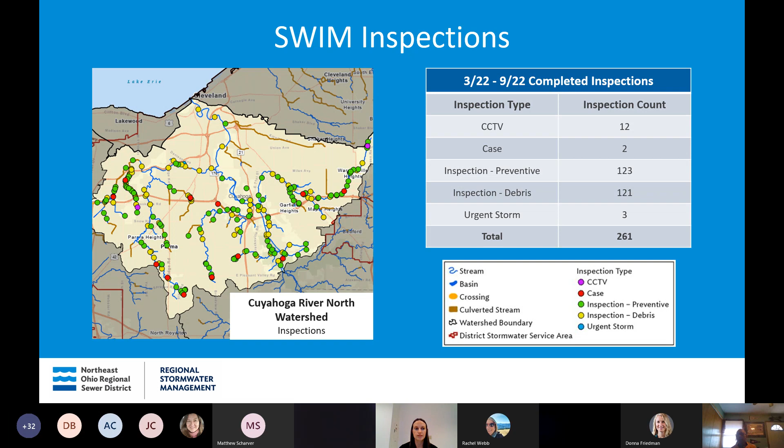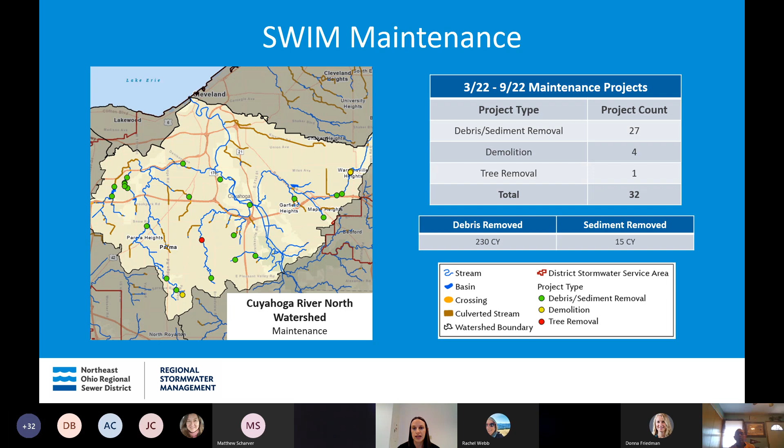And on to maintenance. So we have removed 230 cubic yards of debris and 15 cubic yards of sediment in the north, with 27 of those being debris and sediment removal projects. We've also performed 4 demolition projects and 1 tree removal.

Some of the larger scale projects we performed recently, one of these is a large scale sediment removal project that we did at Riverview Road in Brecksville. Riverview Road frequently floods, flow regularly overtops the roadway during wet weather, causing road closures. This crossing is immediately downstream of sediment vaults, and there was minimal freeboard, about 3 inches at the crossing under Riverview Road. So this project that we performed created over a foot of freeboard by dredging 500 feet downstream of Riverview Road.

We also jetted sediment from underneath the crossing, performed mechanical and hydrovac removal of the sediment from the vaults, and we also hydrovaced sediment 150 feet upstream of the vaults within the culverted streams. That totaled 472 cubic yards of sediment that we removed.

The two culverts that are upstream that discharge to the sediment vaults were also inspected. One of those carries the primary stream flow to the vaults, and the other is activated during wet weather and acts as an overflow channel. We found that there was some woody debris accumulation in the culverts, which was removed to improve conveyance, but we did leave some bedload material within those culverts.

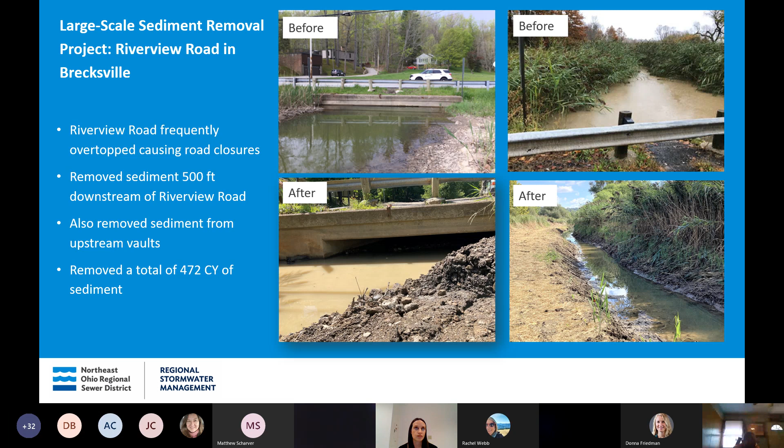We also completed a project upstream of Riverview Road crossing. This is Picha Lake in Brecksville. This basin was filled with sediment and overgrown vegetation. It was designed to be a 1.25 acre wet basin.

But this dredging project is nearing completion to restore the storage capacity to Picha Lake. We removed roughly 8,000 cubic yards of sediment from the basin, which will allow sediment to be captured within the basin, reducing what's transported downstream to the vaults and the Riverview Road crossing. The combination of both projects will allow water to flow more freely and reduce flooding at Riverview Road.

These are both part of an interim project to raise Riverview Road and will provide immediate relief to the nearby residents until that's completed.

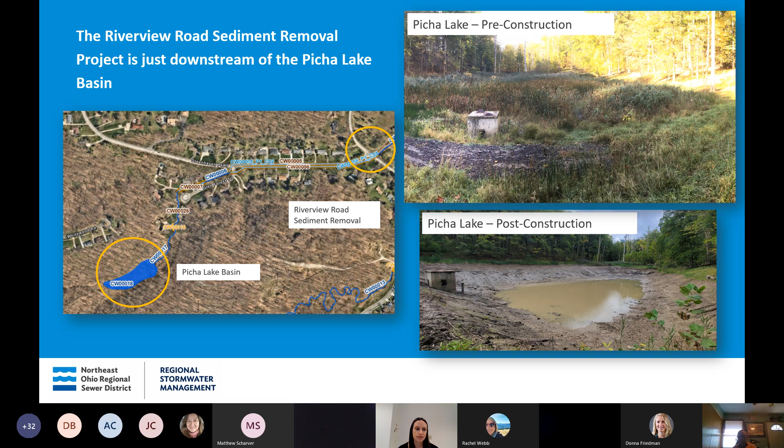The next project I'm going to talk about is our Echo Lake Basin Drawdown in Strongsville. The goal for this project is to restore the wet pond to a natural stream channel. The stormwater master planners found there was no flood reduction benefit in having the pond in place, and the homeowners association and surrounding residents are on board with this project.

This project involved the gradual notching of the concrete impounding structure. The first notching was performed in February 2022, which allowed a stream channel to form, and bare areas were then planted with native seed mix.

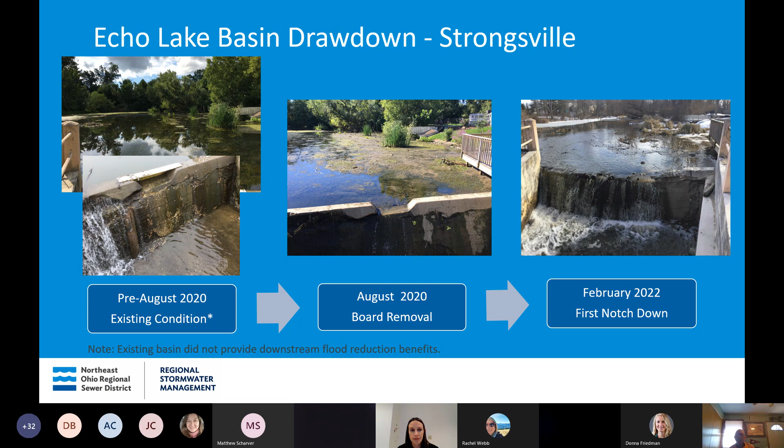The second notching took place in August 2022, which removed 1 foot of concrete across the concrete weir. A future project will fully remove the dam and the crossing to allow restoration to a natural stream channel.

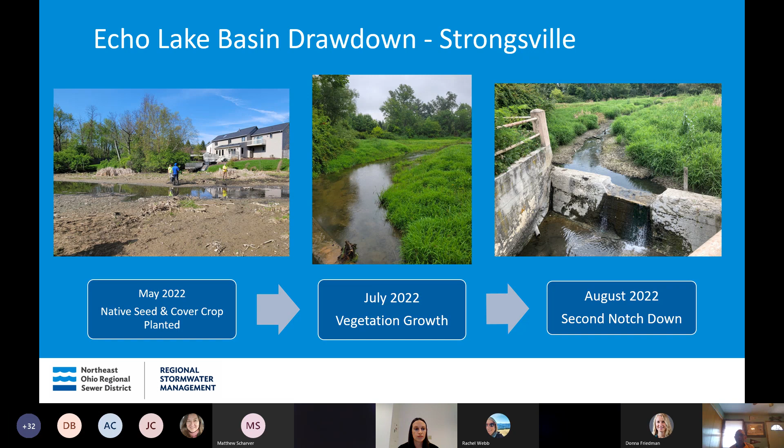Lastly, we completed a tree planting project. As part of our project monitoring plans that we perform at each of our completed project sites, we do this biannually. We identify areas where vegetation might be lacking or has died off, and where we can install additional plantings.

The district received Great Lakes Restoration Initiative funds to plant trees in the county for stormwater management. We chose 3 sites along Stickney Creek, Baldwin Creek, and Pepperloose Creek to install over 130 trees. We continue to look for opportunities to improve vegetation as needed at all of our project sites.

And if there aren't any questions, I'll pass it to Rachel Webb. She's a project manager in Watershed Technical Support.

Thanks, Annie. So I am your Watershed Technical Support representative for today, and I'm going to walk you through where we are with stormwater master plans, and more specifically advanced planning, because we have officially completed all of our stormwater master plans.

There are, as we've mentioned before, areas that came from the stormwater master plan that need additional work, either because of the size, type, or complexity of the project. So we do have 2 contracts for advanced stormwater planning.

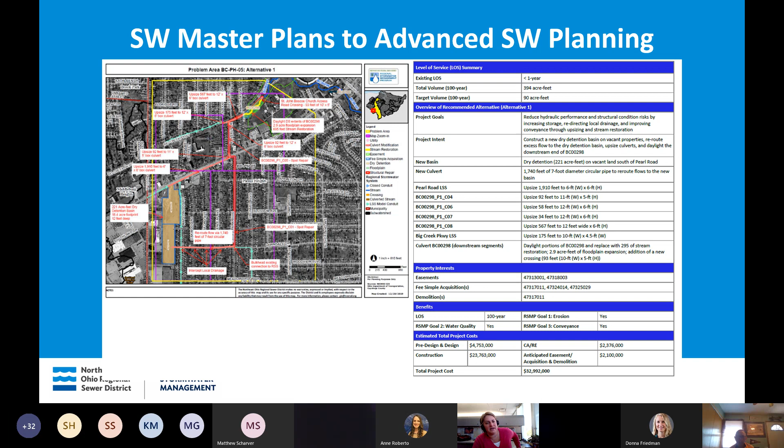We are closing out that first contract that we had with Wade Trim at the end of this year. We've done about 7-8 tasks under that advanced planning project, so we've really had a lot of success with it. And we are well into advanced planning 2.

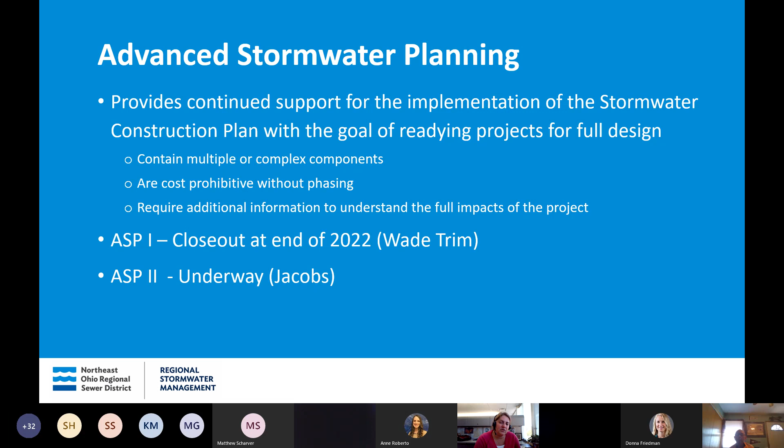We're working with Jacobs. One of the first tasks that we are taking on with this advanced planning is Puritas Basin.

The Stormwater Master Plan actually did not do the standard alternative analysis here because there were so many local inputs into the basin and the environmental issues. It was quite complex, so we are taking it on for advanced planning and doing a more traditional look than we did under the master plan.

So we're assessing what's going on here and trying to see what we can do in terms of maximizing capture and control of stormwater in the basin, while also taking into consideration the environmental concerns associated with Puritas Basin. That is currently underway.

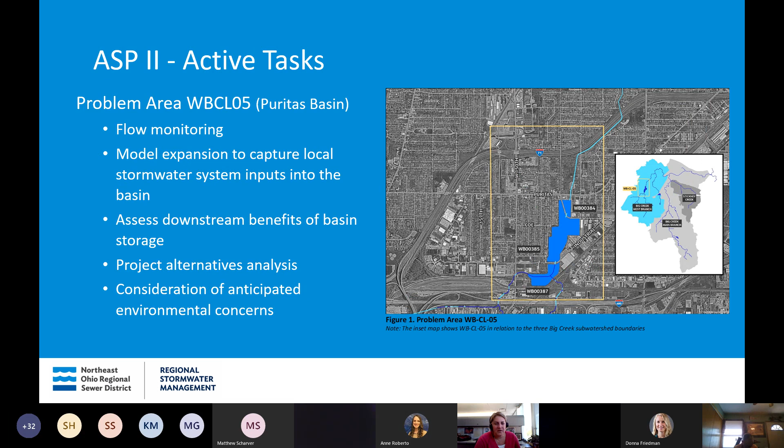We're starting off with some flow monitoring and will evaluate the model and make updates there. More to come. The second task we are looking at is in the Milligan, McGowan, Carrington Avenue area of Cleveland.

West 130th borders or runs right through this area. We are also doing some flow monitoring, but also assessing additional storage opportunities that we did not look at in master planning, and looking at this area in terms of short-term and long-term goals. So that is also underway. More to come.

So that's advanced planning that we have going on in the area. I also wanted to highlight the 319 grant program projects that are also captured under Watershed Technical Support.

Since 2018, we provided matching funds for 13 319 projects in our service area. You can see a couple listed here as it relates to Cuyahoga River North, West Creek. The Padua Stream Restoration is one of the 319 projects that we have provided matching funding to.

Wanted to highlight these to you as communities in terms of opportunities you may see, or watershed groups you're working with, from our Stormwater Master Plan or other sources for those types of projects. So if you want to talk further about this, give us a ring, Donna, or one of the other watershed team leaders, and we're happy to talk further about it.

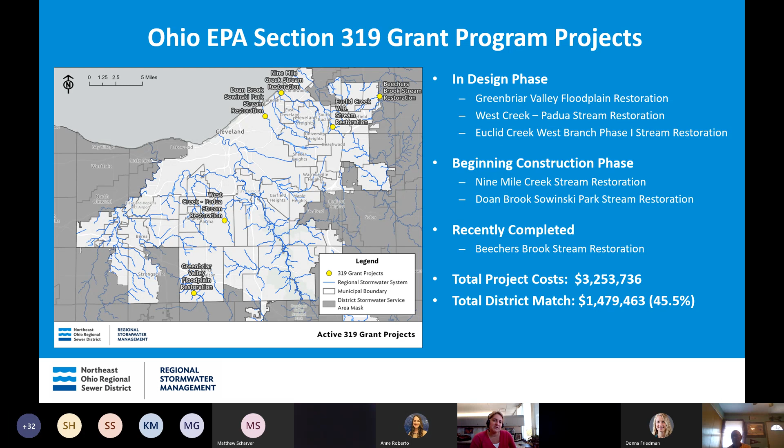The 319 projects are an important piece, and they do a lot of really good stream restoration across the service area. So, kind of short and sweet for advanced planning—a lot happening, a lot going on, and we're looking forward to those updates in the next WAC meeting, I believe in March. So we should have a lot more to show you. At this point, I'm going to pass it over to George Remius, who is Manager of Stormwater Strategic Support.

Thanks, Rachel. Next slide, please. All right, so this is a quick overview of what we're going to talk about.

I'm going to talk a little bit about our model data management, a new contract with the USGS and some of the new features that come along with that, and then some of the new features that we recently invested with our gauge-adjusted radar rainfall contract, and an ask for some potential pilot member communities to help with one of those new features.

With our model data management contract that started late February of this year, the intent is to make sure that we always have master models available for everyone here in the service area as they conduct either their own analysis or their own projects, to make sure we represent that here. So we've been busy trying to take the current projects that we're aware of, and with some new standards, applying those across the service area for consistency. We'll give you a quick update on where those models are.

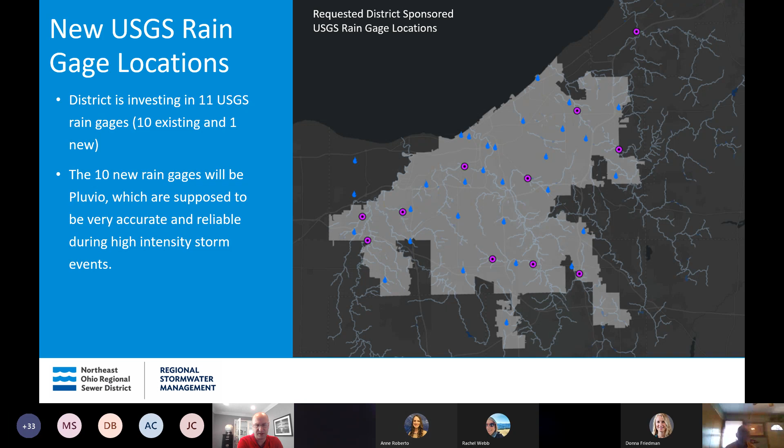Also, something new: along the Cuyahoga River itself, we're going to be working with the USGS to develop flood inundation mapping for 16.4 miles. These figures you see here to the right reflect those stretches of the Cuyahoga River—one starting near Harvard Avenue and extending a bit further upstream, and a third one by Vaughn Road, from I-271 between Vaughn Road and downstream of that as well.

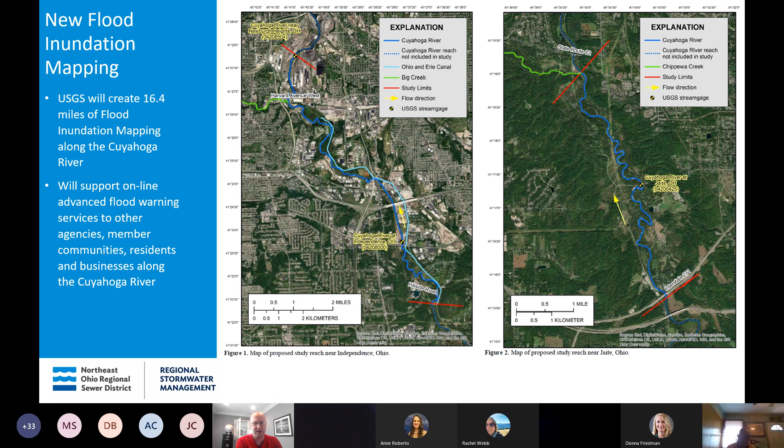And so those areas are going to get this flood inundation mapping using HEC-RAS models to reflect that area. If you go to the next slide, there's a little example of what this looks like.

Once this is developed, it'll be online, just like all the other USGS data, free for public access. It'll act almost as a slider bar in this one graphic with the purple, red, orange, and yellow.

Those are the National Weather Service flood stages of action, minor, moderate, and major. You can see the stream level in its current state, as well as some predicted values for this particular site.

You can slide up and down on that scale, and the inundation mapping that you see to the right would then change, expand, and contract based upon that stage.

We feel this will be a great value to understand what could be potentially flooded, and then start utilizing this with our new product in the GAR for advanced flood warning, to help communities, agencies, businesses, and residents prepare in the event of a big storm.

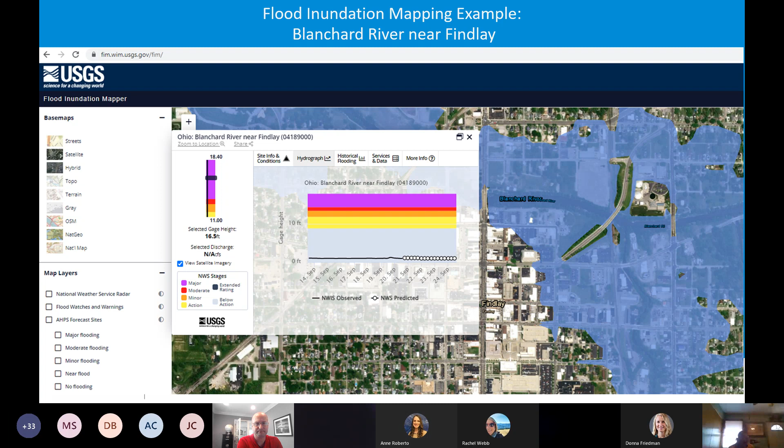All right, on to our gauge-adjusted radar rainfall, or GAR, services. We've been using GAR data since 2016 to support various facets of both our stormwater and wastewater program, and it wasn't until recently this summer that we decided to invest in a couple of new products.

Originally, what we were working on is this grid-based radar rainfall data. It takes the NOAA radar rainfall and adjusts it based upon the district rain gauges and other surrounding rain gauges, making that gauge-adjusted radar rainfall in 5-minute time steps in a 1 kilometer by 1 kilometer grid across over 1,300 square miles.

So it covers all the different watersheds — the Rocky, Chagrin, most of the Cuyahoga River, and the Lake Erie direct tribs. We were doing that to collect end of month data, so 5-minute time steps for all those grids at the end of the month.

But we realized we wanted to have some additional tools to support our urgent storm event response. They had some of those tools available, and we decided to invest in those this summer, and we're going to talk a little bit about those.

So the first one is related to forecasting services. There are 3 different services that they provided.

One of them, they call it preview, gives us a forecasting of rainfall 0 to 1 hour ahead of time in 5-minute time steps for the entire grid.

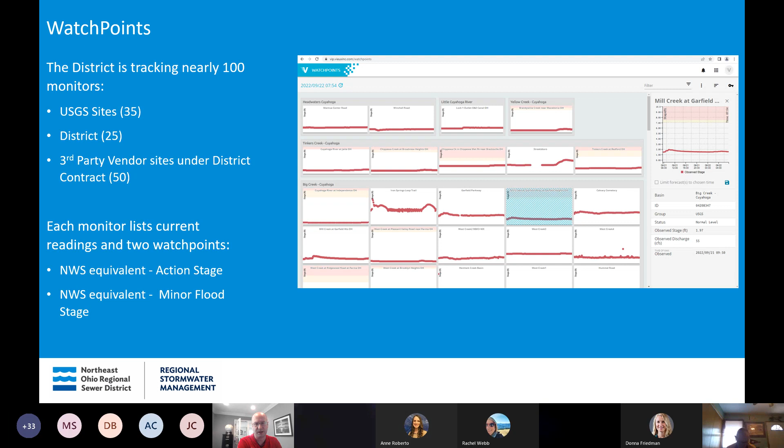We can create it for a group of people or a single person. Whether or not you are interested in your stream, let me know when this particular monitor reaches a flood stage. We can do this for forecasted data sets, the existing, the real time, or any of the monitors. We're also talking to the company to create complex rules, so if the monitor is at an action stage and there's forecasted additional 2-3 inches of rain projected that same day, maybe that's the rule that makes sense, and that's the alert to develop.

And so with that, we realize there's a lot of opportunity here, but also a lot of questions people may have before we proceed with those rules. Moving on to the last slide, if there's a lot of opportunity for regional rules, there's also a lot of opportunity for local rules.

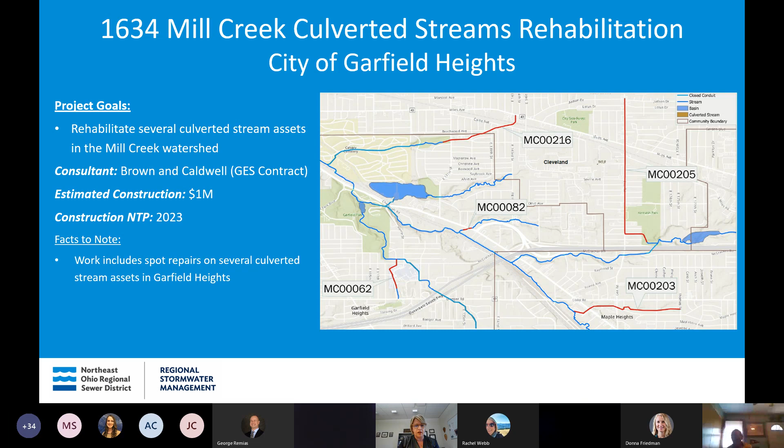The next project takes it to the next level. This is what we're calling our renewal of culverted streams. This project involves 3 sections of culverted streams which are in very poor condition and need to either be completely relined or completely replaced. In the first image to the left, there are 2 sections of culverted stream, again in Mill Creek. The first one to the north is around the Marymount campus, and the second one south of I-480 is running through some residential neighborhoods. You can see those 2 asset IDs labeled there.

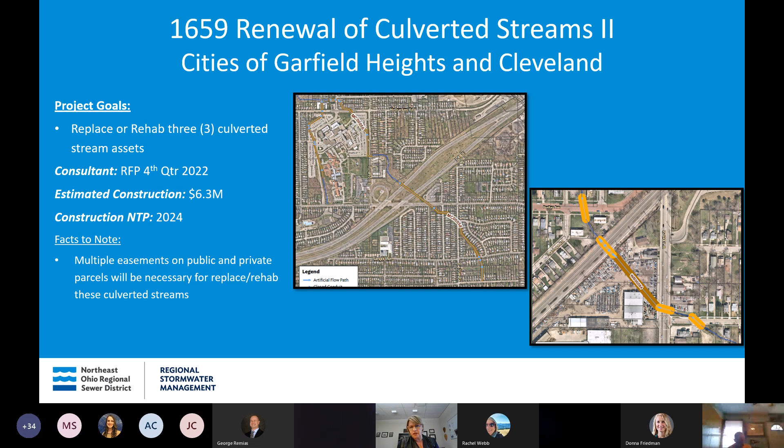A third culverted stream section was identified on the west branch of Big Creek in the city of Cleveland, right near West 130th Street. That is the one you see down there in the bottom corner.

Now we can go ahead.

Also, we are working on some more flood-related types of projects. This one addresses issues along the Kerruish Basin and upstream of it. The Kerruish Basin is owned by the city of Cleveland, and it was built to address flooding downstream in Cleveland and also in Maple Heights. It's a basin that we've done quite a bit of sediment removal in the past because of the eroding stream banks directly upstream of it.

We also have some local as well as some district infrastructure. There's a local sanitary sewer that you can see in the photo, actually hanging above the stream at this point in time, and it's been reinforced with just some telephone poles, unfortunately. So we'll be addressing that as part of the project. Then there's the Mill Creek Interceptor, which is encased in concrete just upstream of Kerruish Basin as well. This one is just kicking off design right now.

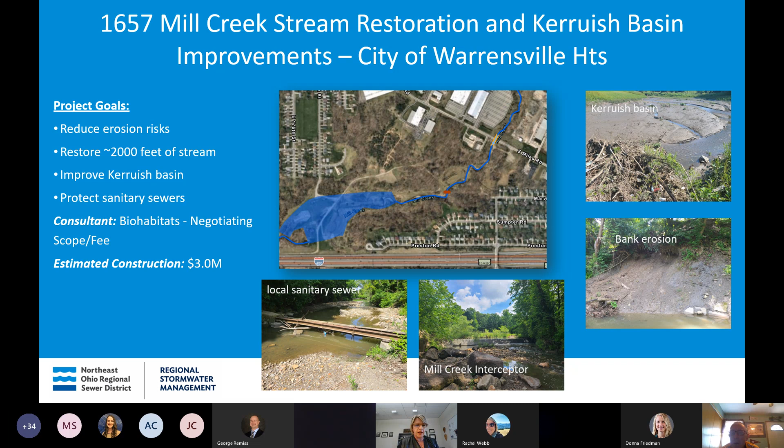The last design project I'll highlight is in the city of Parma. This is the Veterans Basin improvements. The area downstream of this is on West Creek, and it has experienced quite a bit of flooding over the years. What we'll be doing is taking basically a recreational or aesthetic pond and converting it into a dry detention basin. We're also going to be expanding the basin in order to get more capacity.

One of the benefits of a project like this is that it's happening in a public park, so we'll be working with the city to do some enhancements there, but the property is available. Anywhere we can repurpose anything owned by one of the communities, there's an advantage because we don't have to negotiate property purchases or easements. It really does help the project along. So if you have anything in your communities that could possibly be repurposed for stormwater detention or floodplain expansion, we'll be happy to work with you on that.

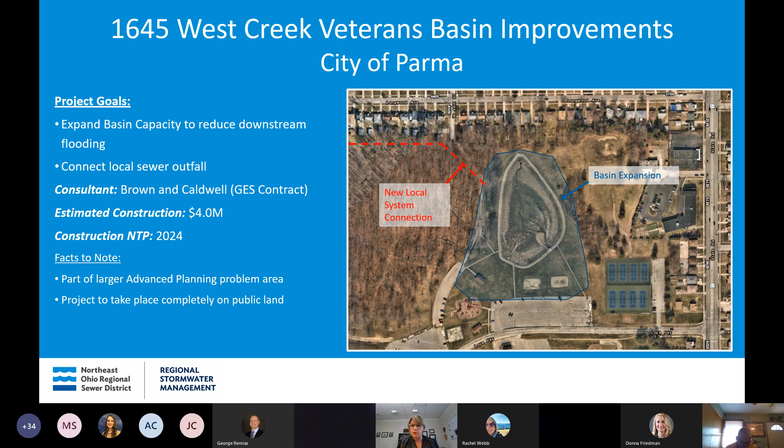In the stormwater construction group, they've been working on 16 different projects. One is the Big Creek flood reduction near Sprague Road in the cities of North Royalton and Parma. We've been working on this project for quite a few years, first with the acquisition of 2 properties shown shaded in the background of the drawing. We purchased those properties, demolished those homes, and we're realigning and restoring the stream section through there, but we're also going to be upsizing the crossing under Sprague Road. Both communities have contributed towards the replacement of that culvert, and we're very happy to be working with them.

We're always willing to partner up on a project like this. If there's a roadway crossing that needs to be improved, upsized, or replaced, we're happy to incorporate that into the project and work with you on a cost share agreement for that.

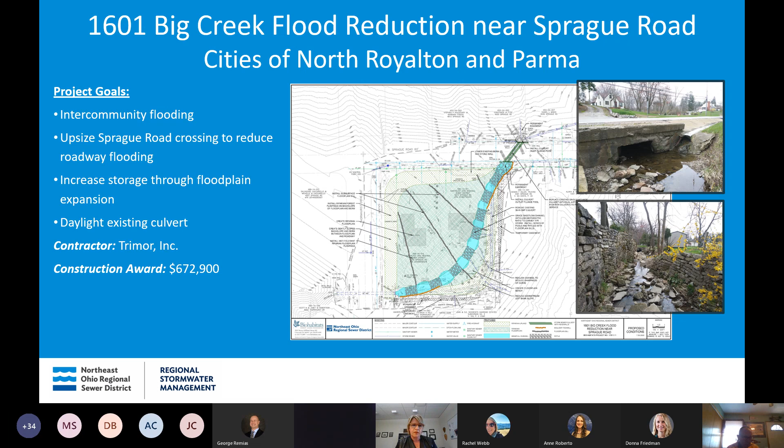Also in Parma, we've kicked off our Upper Ridgewood Basin improvements. This project is somewhat similar to the Veterans Basin highlighted in the design projects. This again was a recreational pond located in Parma on parkland that we're in the process of dewatering, and then we'll be expanding it to create more storage to help reduce flooding downstream.

Both of these projects were also part of a larger advanced planning problem area where, as Rachel had mentioned before, we took some large project areas and broke them down, and we're looking for the pieces of those projects that we can move forward with sooner than later.

So both of these have come out of that, and we'll be looking for more opportunities like this as we continue on with the program.

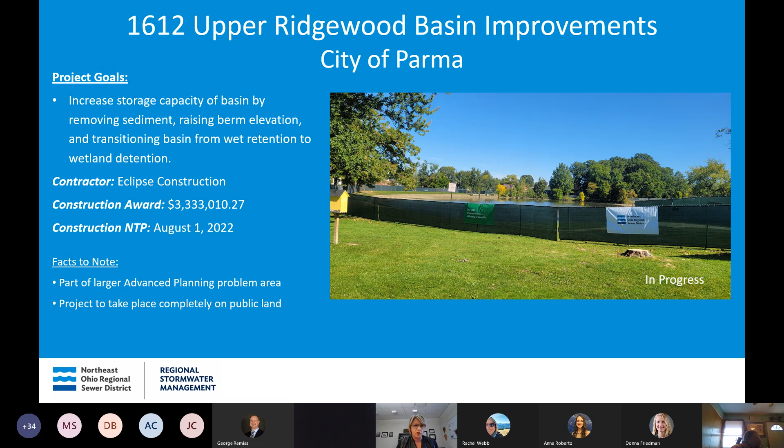And then the last construction project that I'll highlight is our debris racks and access project. This project kicked off a couple years ago. We were addressing access issues and also building debris racks in 6 different locations along the regional system. This really speaks to how we're trying to improve our maintenance program. These were areas that we have had repetitive issues with debris buildup.

The site that you see there in progress, that's the Emerald Parkway culvert. That culvert had collapsed several years ago, and we relined it, but we continued to have debris issues in the culvert, and we had issues with getting down to it. So with a project like this, we're really improving our maintenance, our ability to get to the site, our ability to make sure that the debris is not getting stuck inside the culverts, which of course is much more difficult to remove.

And we'll be continuing to look for opportunities like this throughout the regional system.

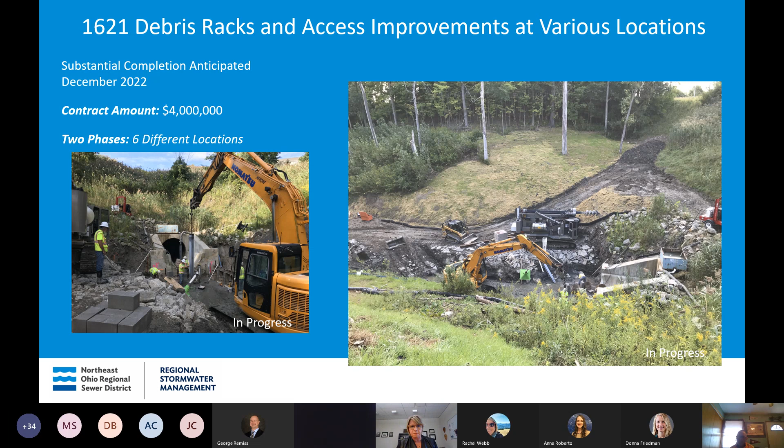And with that, I'm going to turn it over to Jeff Jowett, our Community Discharge Permit Program Manager. Thank you.

Thank you, Janet. So as Matt mentioned at the beginning of the meeting, we are updating our code of regulations. I'm going to provide you an overview on the updates to Title III, our separate sanitary sewer code of regulations, and Title IV, our combined sewer regulations, and then a minor change to our Title V, which is our stormwater code of regulations.

So what we did with Title III and Title IV, we pretty much did a complete repeal and replacement of those documents to bring them updated and align them with the other codes of regulations that the sewer district has. Title III provides requirements and procedures for communities served by the district that have separate sanitary sewers, and Title IV provides requirements and procedures for communities served by the district that have combined sewers and or are tributary to the district's combined sewer system. The sewer district gets the authority for these codes of regulations through the Ohio Revised Code, section 611908. Both of these titles help to ensure that the local sewers are being properly maintained and are functioning properly.

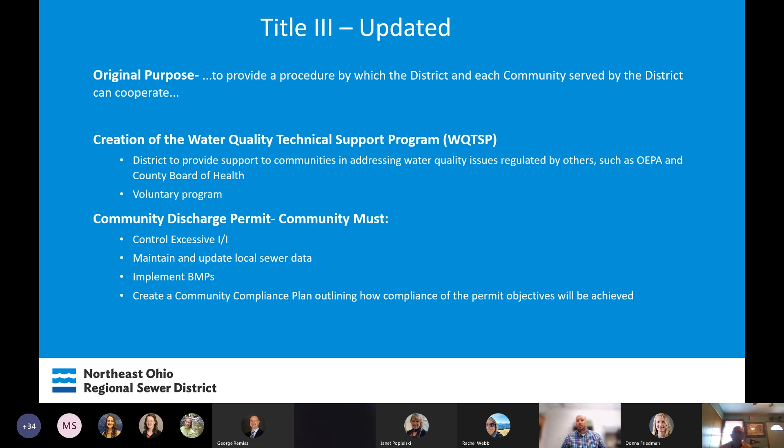Like I said, we also updated Title IV similarly to the way that we updated Title III, where we went through and updated the document structure to improve usability and consistency throughout the other codes. Again, we looked at the definitions, removed some terms that were not being used, and updated other definitions so that they would be consistent with those other titles. The biggest change here in Title IV is a new chapter on connections to or disconnections from the combined sewer system.

So what this chapter does is we pulled language that was already in Title IV and put it into one single chapter just to make it more user-friendly for our member communities. It clearly identifies the process already being implemented for connections to the combined sewer system, and references a policy we already have in place for those connection requirements. This chapter and the process to review connections and disconnections from the combined sewer system is important to ensure new development doesn't increase runoff into the system, potentially causing increased overflows downstream.

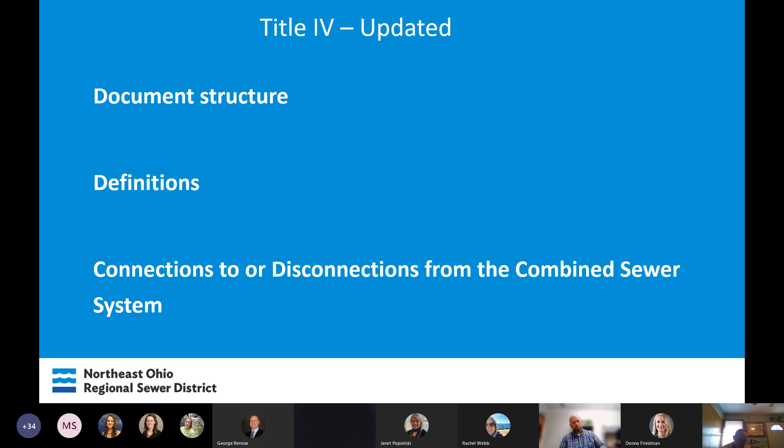Now, these updates to Title III and Title IV are going to be beneficial in many ways. Just providing consistency across all of our titles is going to be a benefit, and it's going to help district staff and our member communities in their usability.

We're also planning on updating the permits to have just one unified permit. As it stands now, communities with separate sewers and combined sewers have two permits, a Title IV permit and a Title III permit. We're going to create just that one permit, where the requirements of Title III and Title IV will be put into that single permit, just to make it easier for our member communities to comply with the permit program.

We're going to improve the utilization of district resources. Title III and Title IV and the unified permits will align better to help utilize the Local Sewer System Evaluation Study. All of our member communities should have received their community report from the LSSESs already conducted, identifying where those problems are and also identifying high-level solutions. We want to make sure the titles and permits align with the investment of the LSSESs, and then set up our member communities to be in a good position to acquire the MCIP funding.

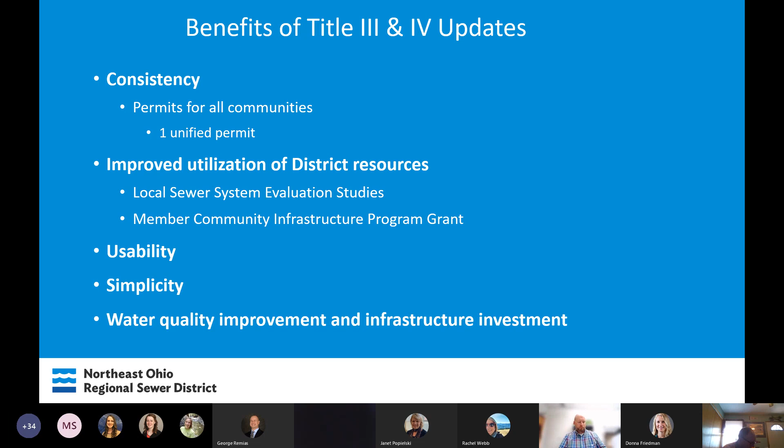So those are the updates on Title III and IV, and we just sent those to the board along with this minor update I'll tell you about on Title V. These will be sent out for 30-day review sometime this week, so we hope you'll take a look and provide us any comments or feedback. Then we will be making our rounds to our member communities, providing updates and more detail, with opportunities for questions and comments at a later date.

Title V, just a minor update, but I think it's a big one because it's increasing folks' ability to apply and receive credits. Now folks can receive a credit for partial responsibility of maintenance from a stormwater control measure. In the past, they had to have 100% responsibility. Also, they no longer have to drain to that stormwater control measure, or SCM, if that SCM is oversized to compensate for that area and they are partially responsible for it. So we're opening up the credit program so that more folks can receive that discount and credit from the stormwater fee.

We updated the associated impervious surface definition so it accurately reflects the changes made to the credit eligibility. So those are the updates I have for you today on Titles 3, 4, and 5. Like I said, we will be reaching out to our member communities with more information on Titles 3, 4, and 5 and the unified permit at a later date. Thank you, now I'll hand it back over to Donna Friedman.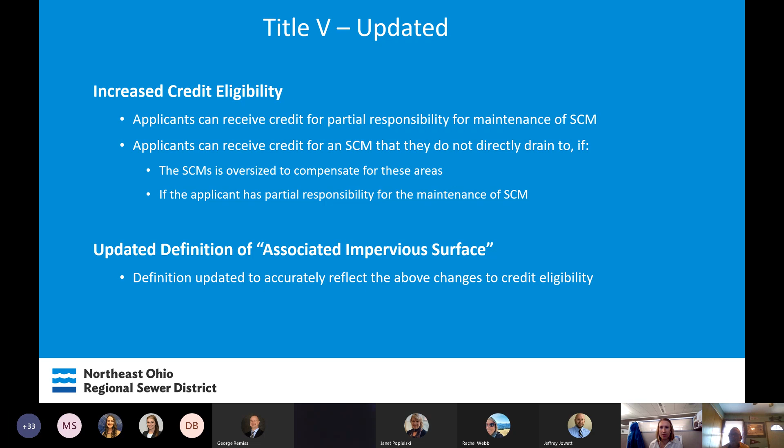So as you know, we have this program next year as well, hopefully $15 million again, and contracts for this year's awardees will be going out soon if you haven't received it yet. Next round applications are due in the spring, so look forward to that.

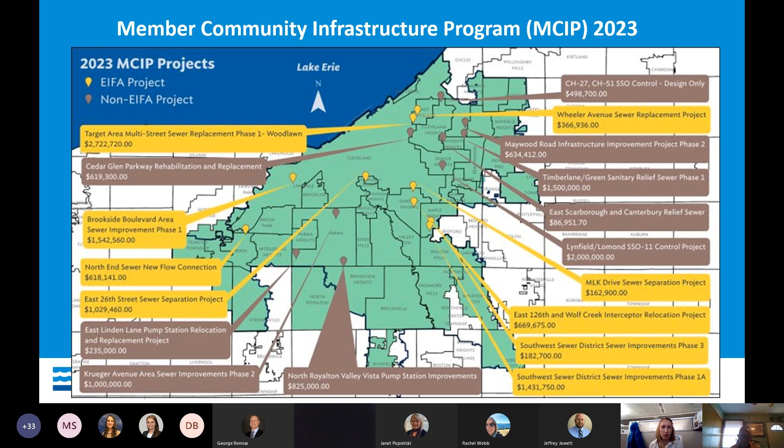Next up, we have the Infrastructure Investment and Jobs Act - the bipartisan infrastructure funding that was pushed out. This is the money that went through to the Ohio EPA for the Ohio Clean Water State Revolving Fund. Approximately $100 million per year would be pushed to the Water Pollution Control Loan Fund. It's going to be 5 years of funding, and 49% of that funding each year is required to be in grant format.

So they're referring to it as principal forgiveness. These grants are focused on disadvantaged communities, and OEPA has their own criteria for that, which I will show next. The district's goal, and why we got involved, was because we wanted to bring the maximum amount of grant funding through this IIJA grant to the region. So we decided to get involved and assist with applications for this money.

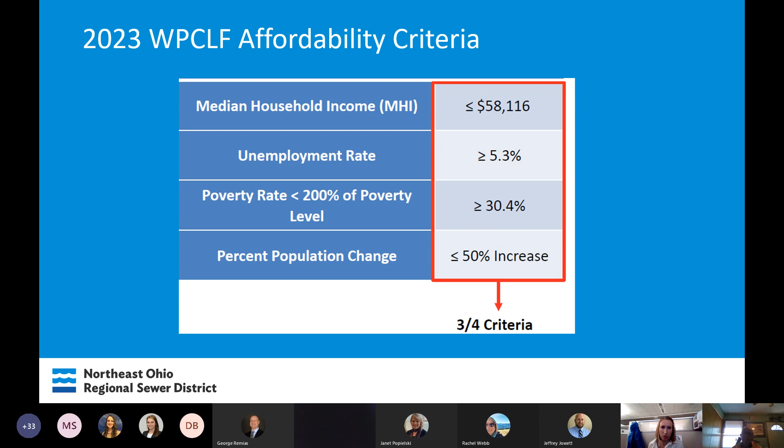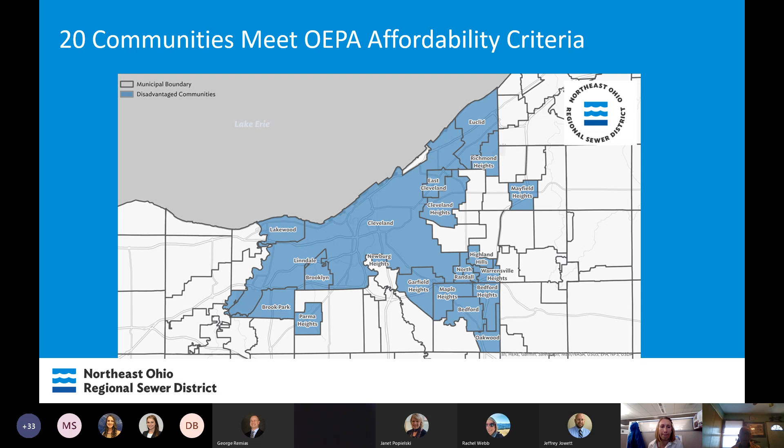And so the submittal process - this was our first year doing this because it was the first year that grant principal loan forgiveness was available. Communities that fell within this criteria provided those projects to us that they were interested in. We reviewed those projects alongside our local sewer system evaluation studies. We looked at what tier those projects fell into, and tried to identify whether or not that project was something we knew we could design in a relatively short amount of time and do a good job doing that.

And then we put in applications. We ended up applying for 8 projects, about $8.3 million, and they were all design projects. So if we are awarded next year, we'll be seeking construction funding for some of those projects, but we'll also potentially be seeking to design more projects as well. So if you fell into that criteria, or you think you may next year, please let us know if you have any projects you are interested in us working on.

For those projects, the sewer district assisted with forming the application, but the community still had to be the applicant. Then if the award goes out, the district will be taking over design and construction of that project.